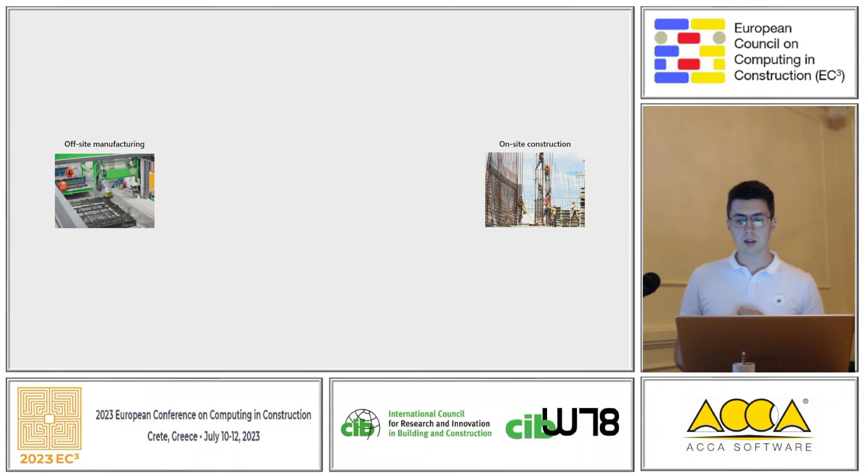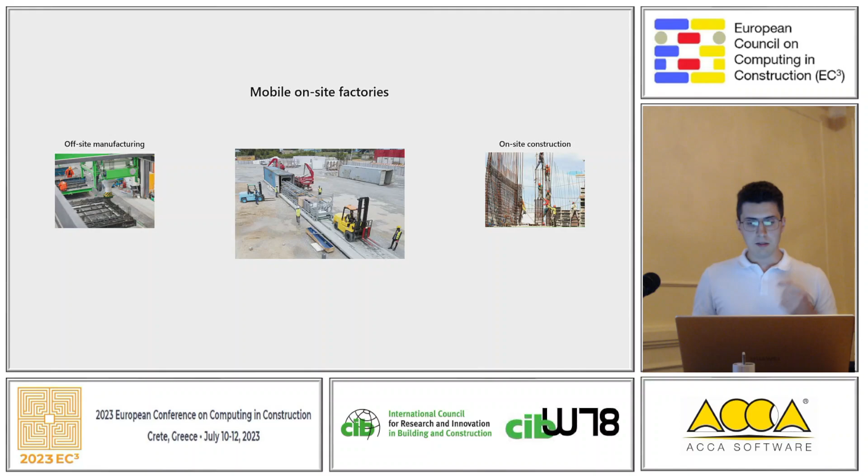If we use on-site construction, we will likely suffer from poor efficiency. If we use off-site manufacturing, we will be more efficient, but we will cause long transport distances. Recently, research suggests the application of mobile factories for more efficient and sustainable on-demand production. The factory is delivered to the site, the temporary structure is assembled, and then production takes place in this safe environment.

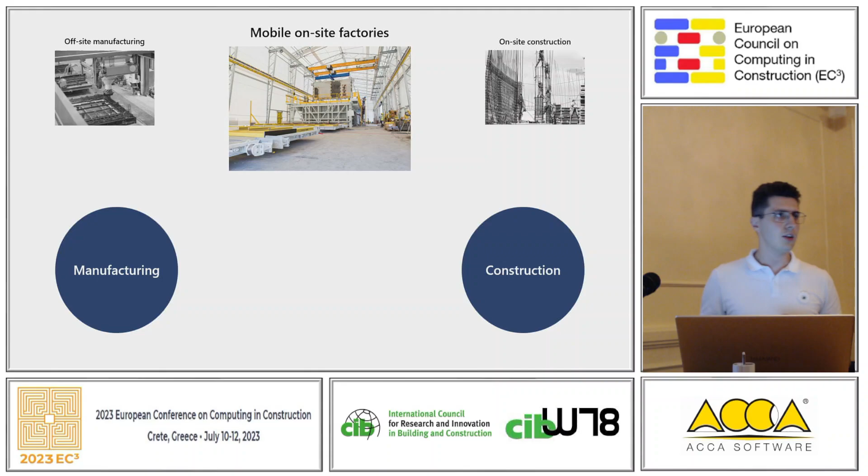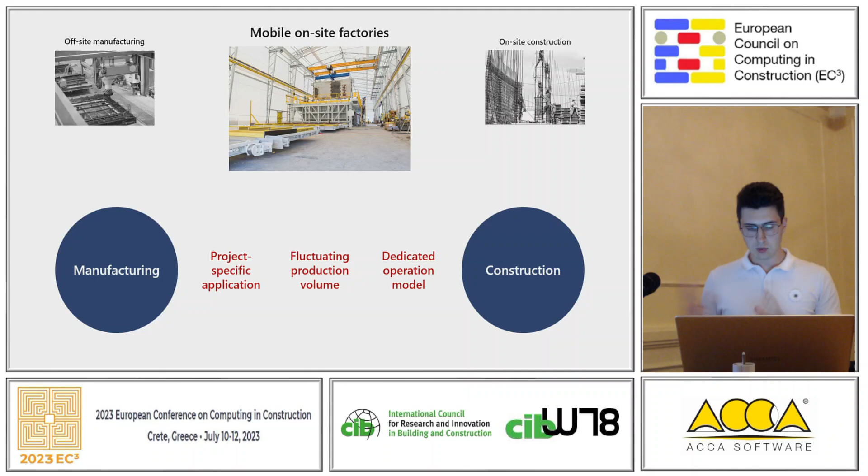However, the mobile factories will be operated on the intersection of manufacturing and construction. This brings some unique challenges. First of all, the factories are only operated for a single project and cannot balance workloads across projects. This causes a fluctuating production volume. And still these factories are systems with dedicated operations models, so they don't belong to the specific construction activities. I want to address this with interdisciplinary production management and integrated information management systems.

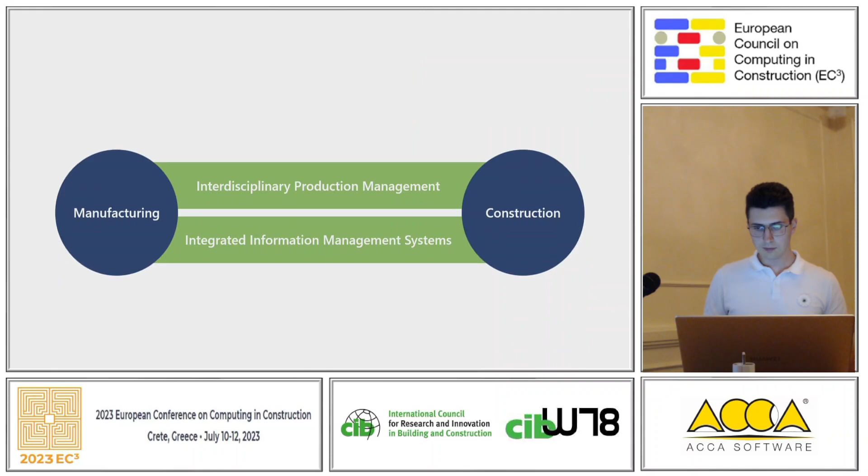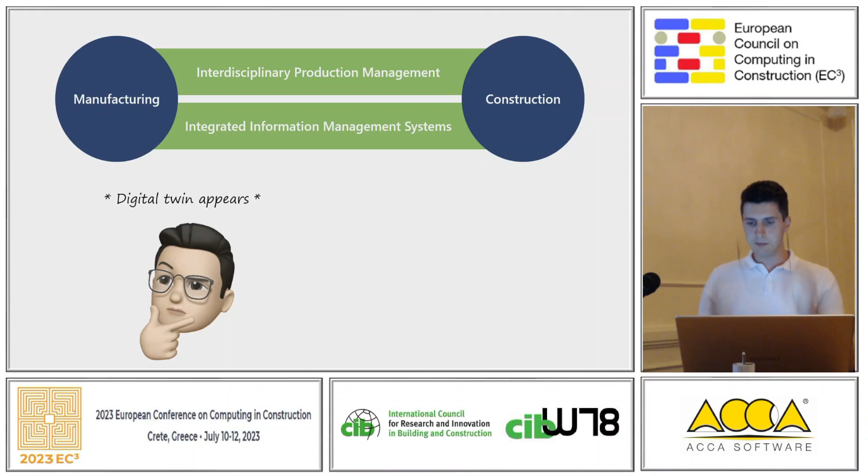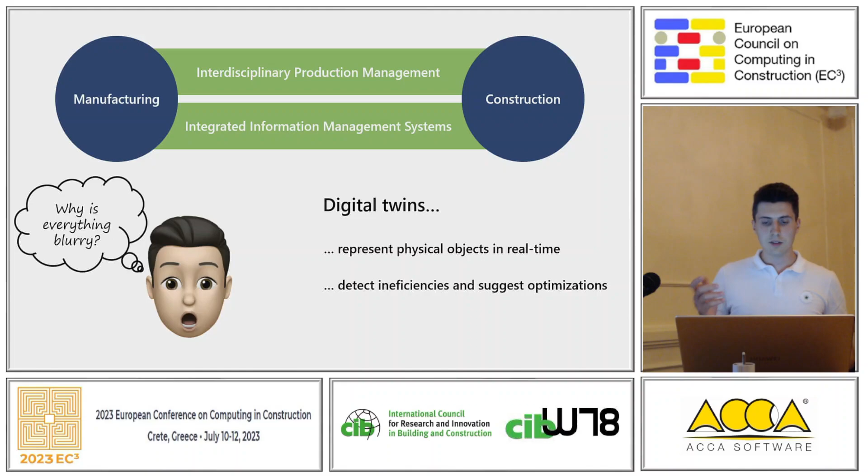So I wonder if there's any concept that could address these two aspects simultaneously. There is. It's a digital twin. Digital twins represent physical objects with virtual data. They represent in real time. So they can also detect inefficiencies and suggest optimizations, for example, like putting the glasses on.

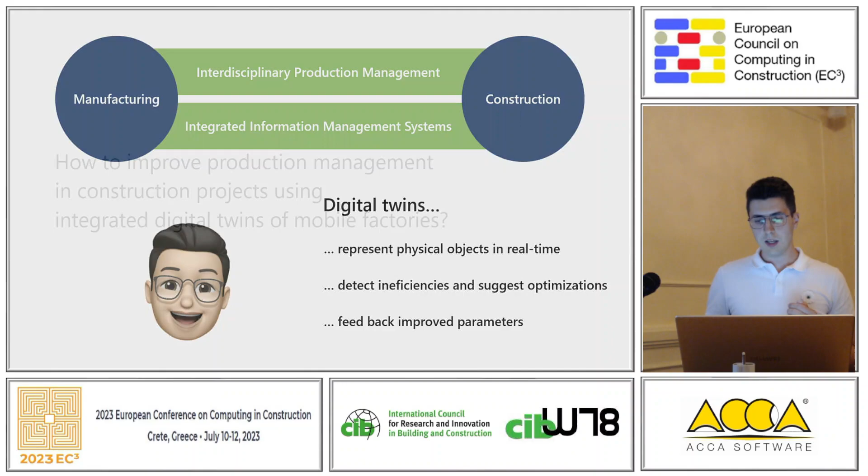Combining digital twins and these two problems, my research question is how to improve production management in construction projects using integrated digital twins of mobile factories. I want to address this in 4 steps. First, I want to see how to capture data, so I will define the information requirements for decision making in prefabrication factories. Then I want to assign real-time digital twin process data to specific product instances for later lifecycle phases.

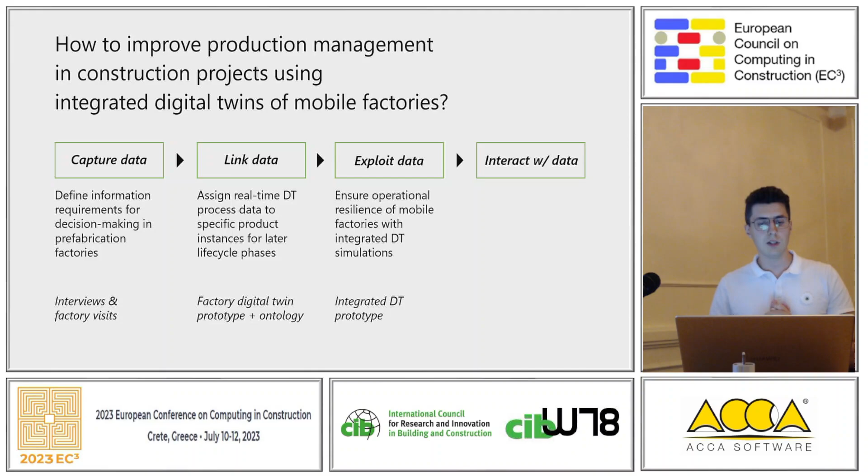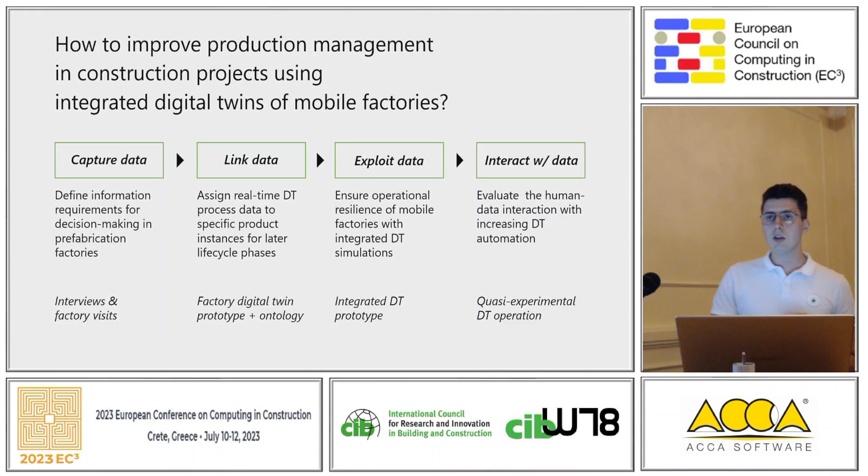I want to exploit this linked data to ensure operational resilience of mobile factories with integrated digital twin simulations. And lastly, I want to evaluate the human data interaction with increasing digital twin automation. This research is part of a research project called Smart Mobile Factory for Infrastructure project with researchers from 4 universities. And the good thing is we have an industry partner that wants to build the infrastructure of the future.